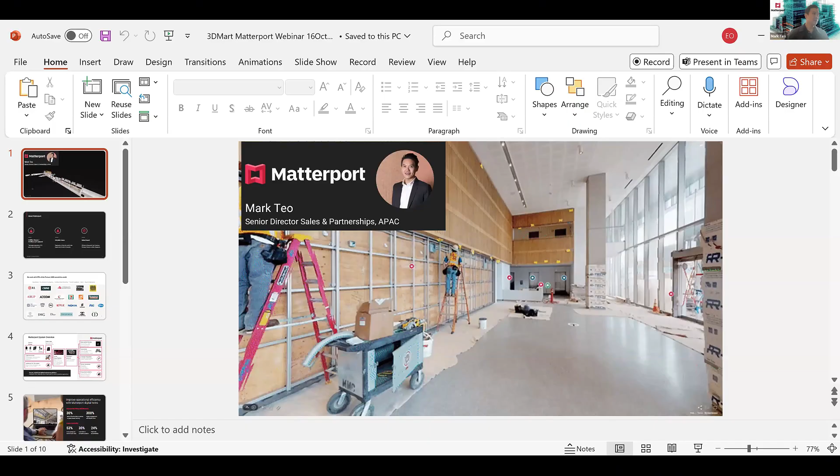Just a quick introduction of myself. By the way, Eleanor, yeah, okay, it's in slideshow mode. Great, so quick introduction of myself.

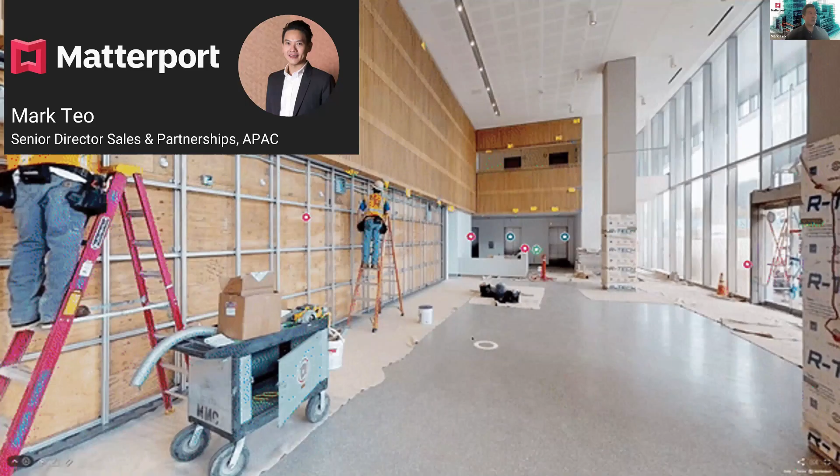My name is Mark, based out of Singapore. I've been with Matterport for over 3 years now, leading the commercial team in Matterport Asia Pacific. Appreciate everybody taking time off your very busy schedule to join us for this webinar.

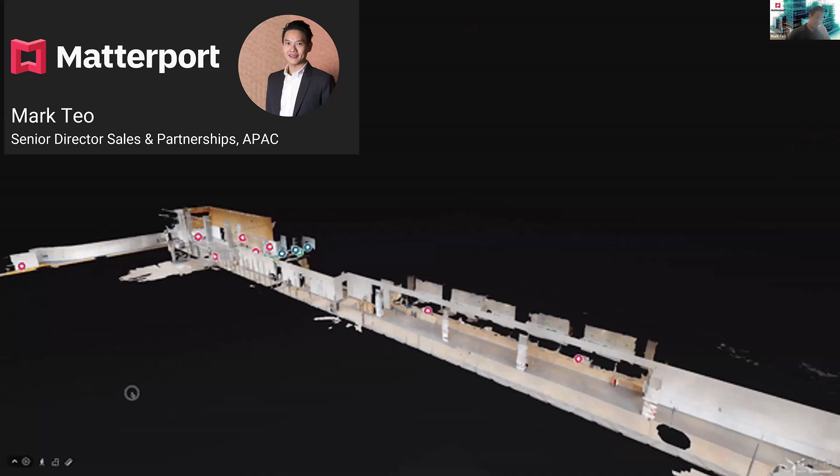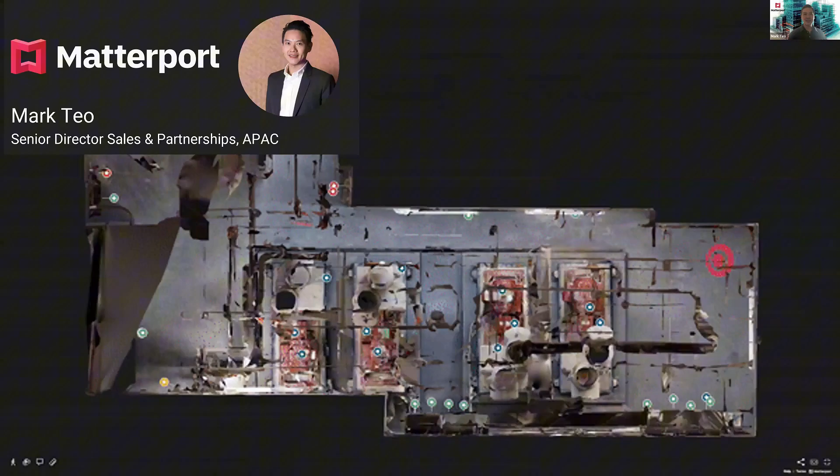So the thing is, something about myself, right? I tried to learn Cantonese, and I grew up watching TVB as a kid. My mom loves watching all the TVB dramas, and I usually just sit beside her and watch the show. And somehow or other, I just couldn't learn the Cantonese language until today. Probably this is one of the big regrets, that I've not been learning a lot of Cantonese in my younger days.

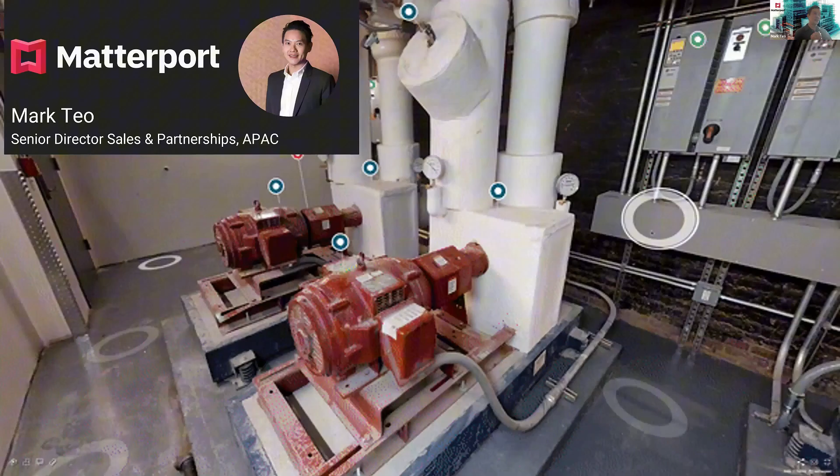So unfortunately, throughout this whole presentation, I'll be sharing Matterport solutions, introducing Matterport in English rather than Cantonese. So yeah, without further ado, I'm going to jump straight into my slide deck.

So quick introduction, Matterport, we are a NASDAQ listed, US-based company. Our HQ is in Sunnyvale, San Francisco, and we do have offices around the world, in Europe, where London is also our European HQ, and Singapore being the HQ for Asia Pacific. We also have presence in Japan and some of the other regions in US.

So just a few nuggets of information about Matterport. It's a company that was founded in 2011 and it got listed through SPAC in 2021, if I remember correctly. The company has grown tremendously, and I can recall this whole growth journey. In the past 3 years, the business was a lot smaller, and we grew tremendously over the past few years.

As you could see from the numbers here about Matterport, we are now managing over 5 million spaces, or rather models, and over 10 billion square feet of spaces that are being captured by our technology. And all over the world, we are seeing more than 250,000 users, and this number is increasing on a daily basis.

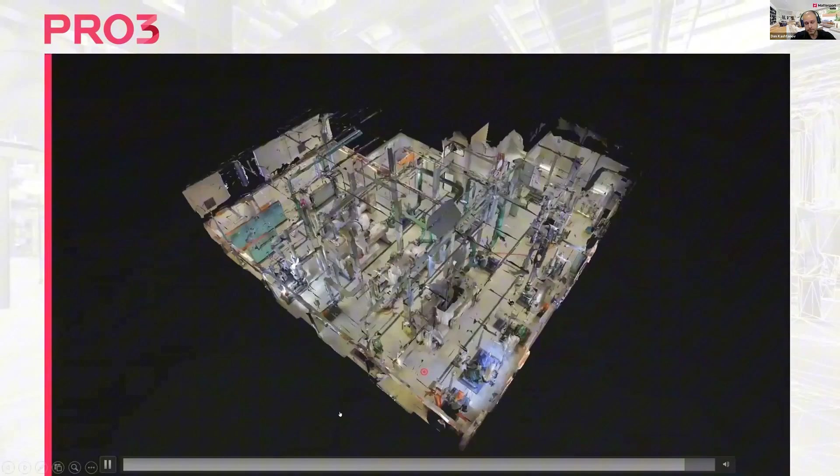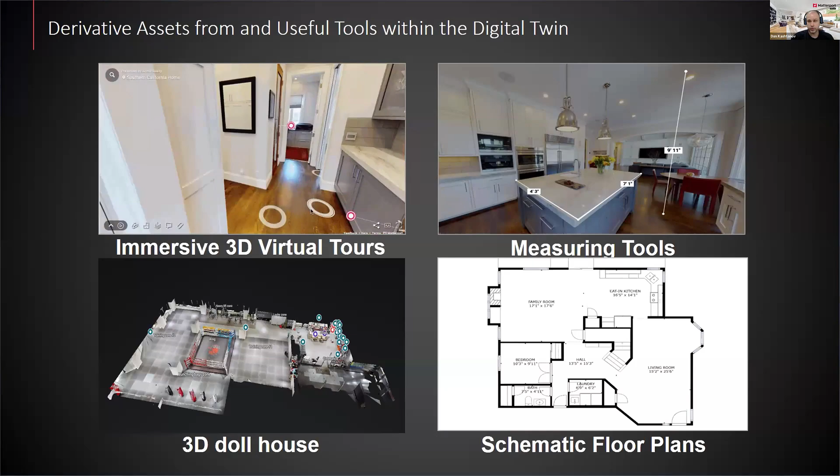Very easy to use. The second part of the solution is the software that will, based on the raw data from your camera, build a virtual tour for you. We'll show you this in a moment. Now let me show you a few examples of my projects.

So this is the virtual tour, one of the virtual tours we have. This is our showroom in Taiwan. This is what you will have after you upload your project to your account.

You see the scan points, and you jump between the scan points. The more scan points you have, the more you scanned, the more steps and jumps you can do.

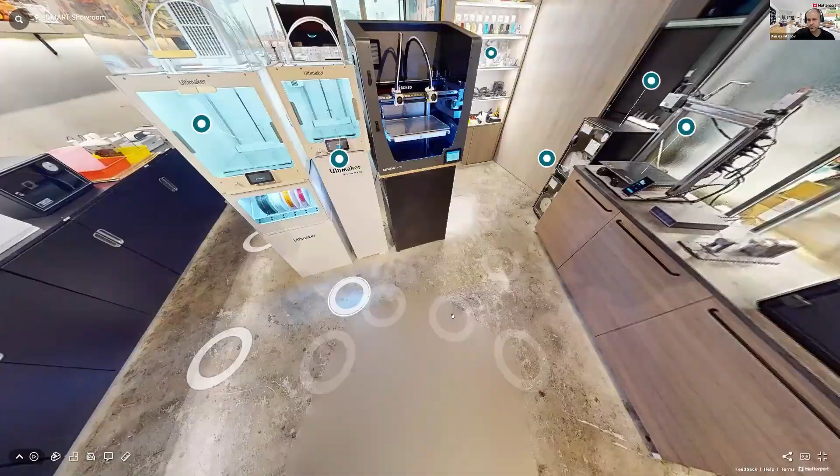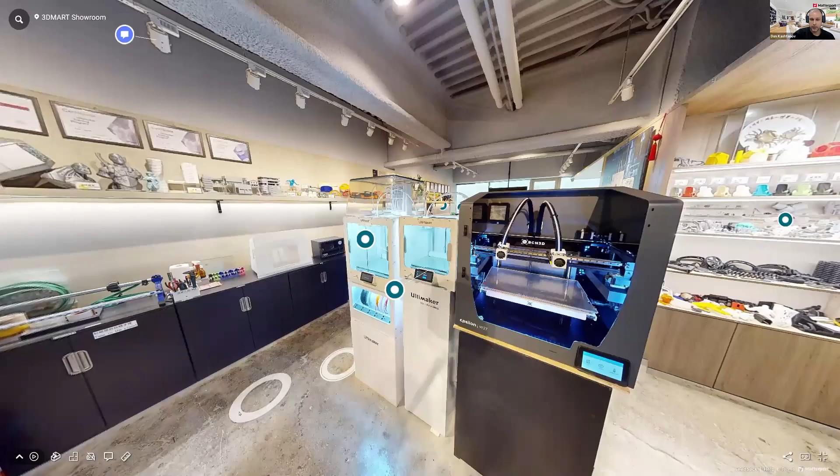You can have Mattertags, and you can put the video there, text, images. You can have rough measurements here. If you need very highly accurate measurements, there is a way to do it, I'll show you later. You need an E57 file, but more or less accurate measurements you can quickly do in this virtual tour.

For example, you can see if your equipment will be able to pass through the door, if the size is enough for your machine or not.

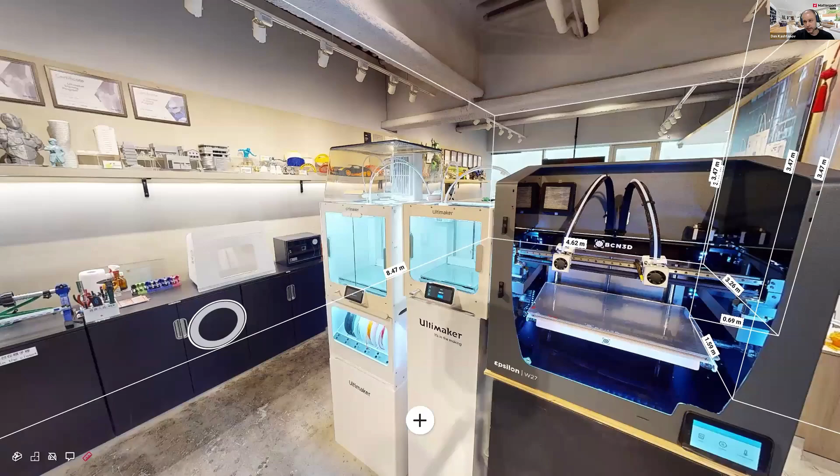Then a few things you can do with your project. If you go to the project editor, you have a few things you can do. You can select the start location, add labels, do the measurements that the customer will see. You can do a guided tour, tags, add notes.

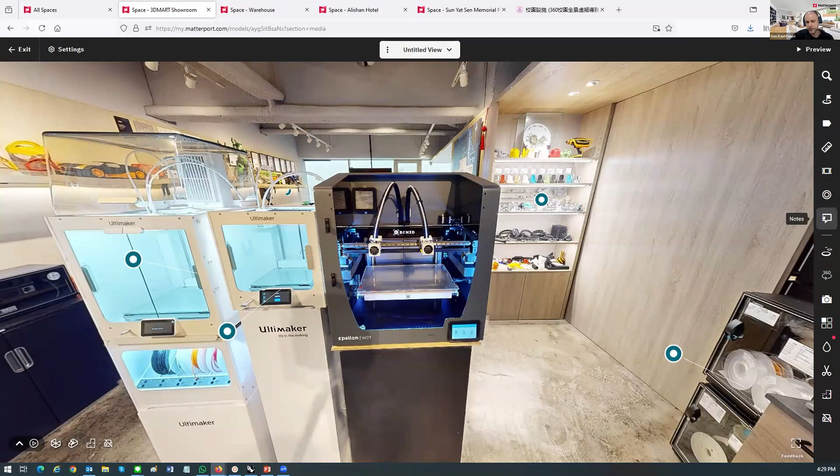This is to help you communicate with your construction team, with your colleagues. You can actually have notes that your colleague will be able to see and reply to.

For example, I just created a note: we need to fix this light. If I send this project to my colleague, they will be able to see this note. They will be able to ask me something, like can you send us the model that we need to change? And I will be able to send them the link. You can talk to your team.

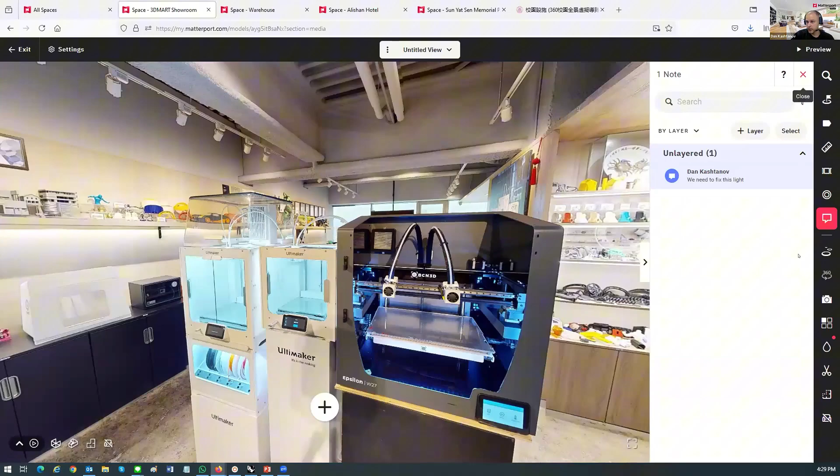You can see your scans, hide your scans, blur something. Let's say there is sensitive information you don't want to show, you can blur it. It will automatically detect faces, and if you wish, it will automatically blur the faces.

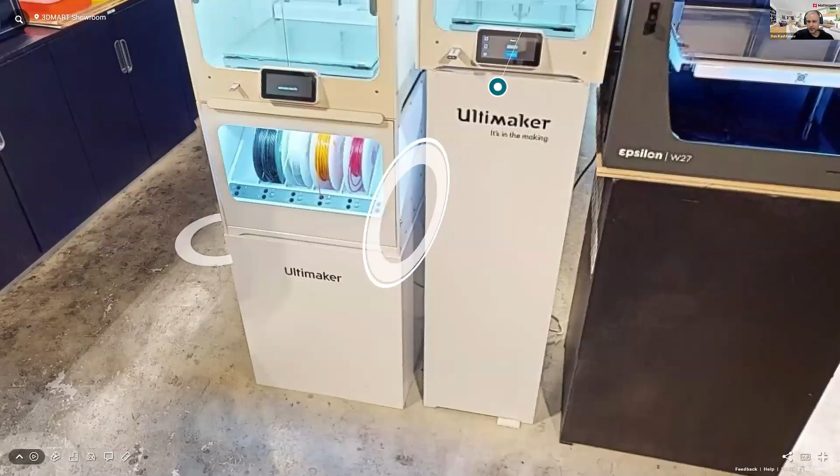That's pretty much it. Now, a cool thing here Mark talked about, but did not tell you more details. There's a new feature here called defurnish.

So you see the space, there's a table. It looks reasonably okay, but some apartments or residential spaces might look a bit cluttered, full of junk, I don't know. If you click the defurnish button, the AI will actually remove the furniture for you. See how cool is that?

Now it works, it's in beta. I guess a few glitches here and there are possible. But this AI tries to predict what's behind the furniture and just remove all the furniture.

And I think it was trained on residential properties, but it actually works on industrial spaces as well.

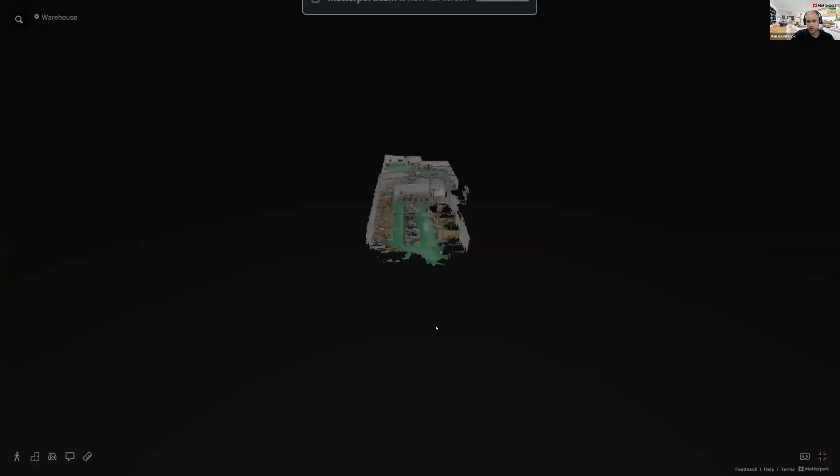We have a warehouse that we scanned for one of our partners. Defurnish works well even in the warehouse, and it doesn't only alter the pictures for you, it actually alters the whole space. You see it's empty space now, but actually it was full of boxes and cargo.

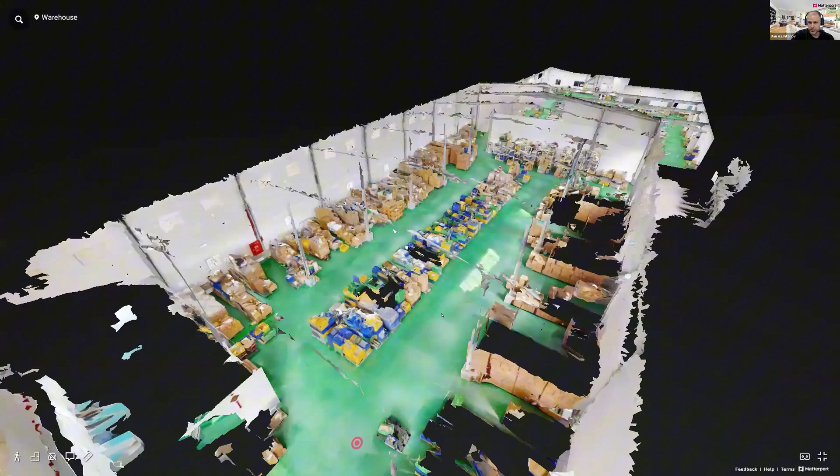Okay, so you can have a virtual tour, you can have a link that you can send to your customer. If you just share the link, you can embed it on your website.

For example, we have a school here in Hong Kong. They have a project of this school embedded on their website, or to show to parents, students, as a way of promotion.

Sometimes if they have a particularly equipped STEM room, they will show the STEM room with all the equipment.

And another thing I like is, let me show you this hotel. Now, this is a big project, a 10 floor hotel. And if we go, let me just show you how big it is.

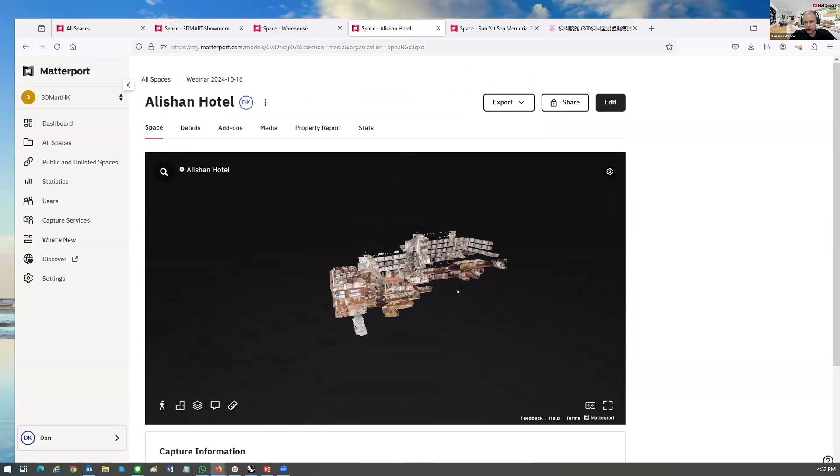Now, if we go to property report, you will see a 2D drawing of every floor, all the rooms and all the sizes. Now you see floor 1, all the rooms with the size, floor 2, and well, all the rooms. Indoor property totals is 5,000 square meters.

We didn't scan all the rooms. It was mostly corridors and exterior, but together with the rooms, it will be even more.

And this is, you have this for no extra charge. You click print, you can print it out, show it to your customers, real estate agents or potential buyers. Now, if you go to add-ons, there are a few things you can buy extra.

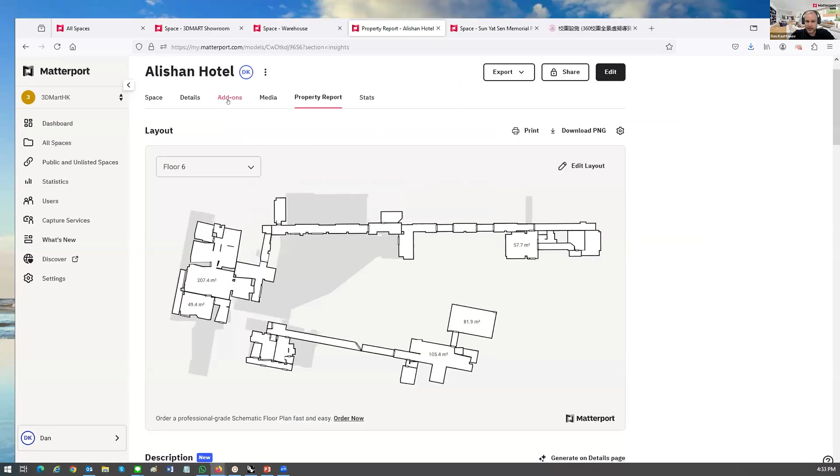They charge, they cost extra. You can buy a schematic floor plan, a professionally built floor plan, not an automatic layout. You can buy a CAD file in DWG format.

Well, some buildings, if they are old, they don't have drawings. We have a customer in the luxury sector occupying a space in the center of Hong Kong. The building is old, they don't have a drawing. So how do you build a drawing?

Well, the easiest way is to scan it with Matterport. You will have this file in hours. Mark, correct me if I'm wrong, I think it's super fast. It takes hours, you will be done in a day, and you will have the drawing of your space.

BIM model file. Some of you are here from architecture and construction sectors. If you are working with BIM models, you can order a BIM model from Matterport. It's quoted case by case, takes some time, but yeah, they will do it for you. And you can have an E57 file.

That's the file with all the data the camera recorded. That's a high density point cloud. And you can use that to do accurate measurements, or you can use it to build your BIM model.

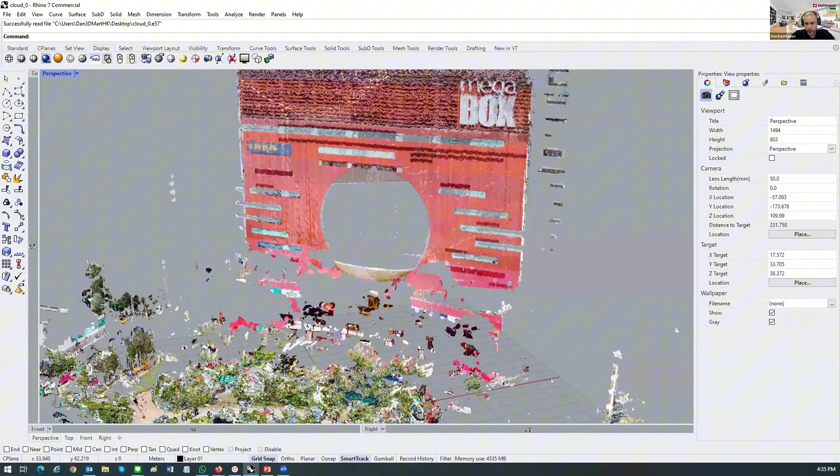Let me show you, just for those of you who don't know what it is. This is a point cloud. We scanned a zero carbon building, just a few scans alongside this path. And this is the point cloud that we downloaded.

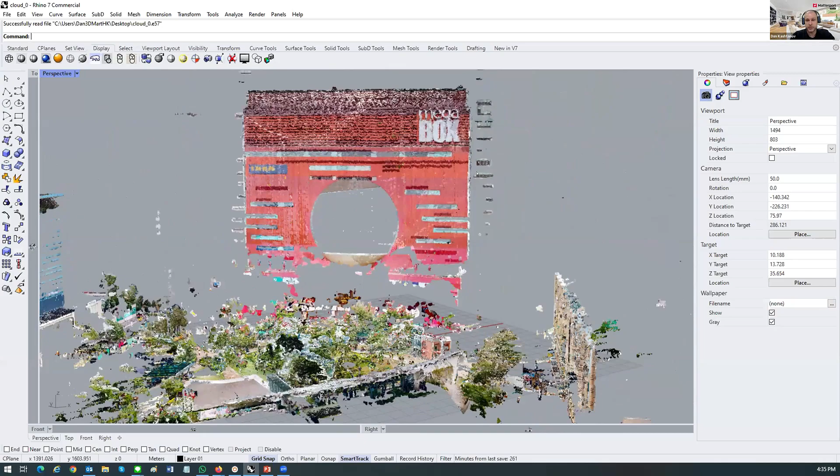How tall is Mega Box? It's a trade mall, 19 floors, and those trade mall floors are probably 5 meters each. So you see the range of the camera. We put the camera in the park, and we can scan the whole Mega Box facade.

So these are the basics you have with Matterport: E57 file, drawings, digital twin, you can do measurements. But there is more you can do, and our partner Robert will tell you more about his software that actually expands the functionality of Matterport to construction monitoring.

There are different software providers that use Matterport in their software. Some add AR, some add VR functionality, but what I found most useful for me and the customers we talk to is actually Robert's software, Sim Stages. So I think I can give the word to Robert to tell us more about his software and his offer.

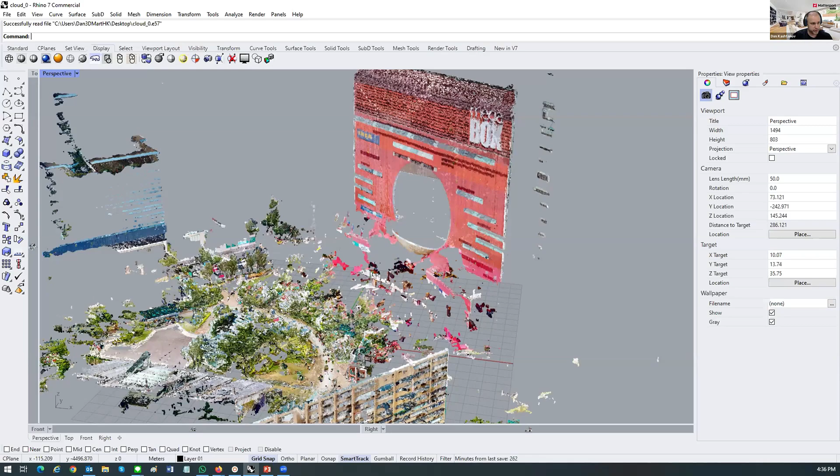Let me stop sharing my screen. And Robert, can you tell us more, please? Sure, thank you very much, Dan. I'm pretty happy that I can be here on this event and tell you a bit about our solution.

First of all, a few words about me and the company I'm representing. My name is Robert Czarlewski, and since April '22 I'm a product owner of Stages at SimLab. SimLab is a company located in Poland, founded in 2015, but its core operations started truly in 2019. The company's first product, Simon, emerged from the interest of

SimLab founder and CEO Marek Kozlak in smart home technologies and building automation. Stages initially began as an experimental project, but we very quickly realized it can be really interesting and has huge potential. In July '21, Matterport announced a strategic partnership and investment in SimLab, recognizing us as a key provider of tools that help AEC teams communicate more efficiently and effectively at every stage of a project. So that's the very brief history of SimLab.

Now, getting back to the main topic of my presentation, what is Stages? We say that Stages is a professional platform designed for monitoring the construction process and facilitating cross-sector communication, providing easy access to building digital documentation. It is specially tailored for building owners, construction companies, general contractors, facility managers, architects, and interior designers, as well as insurance companies and even banks.

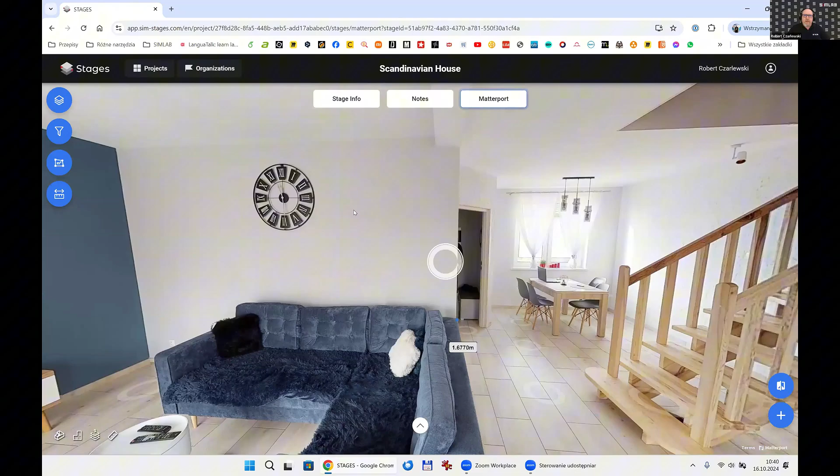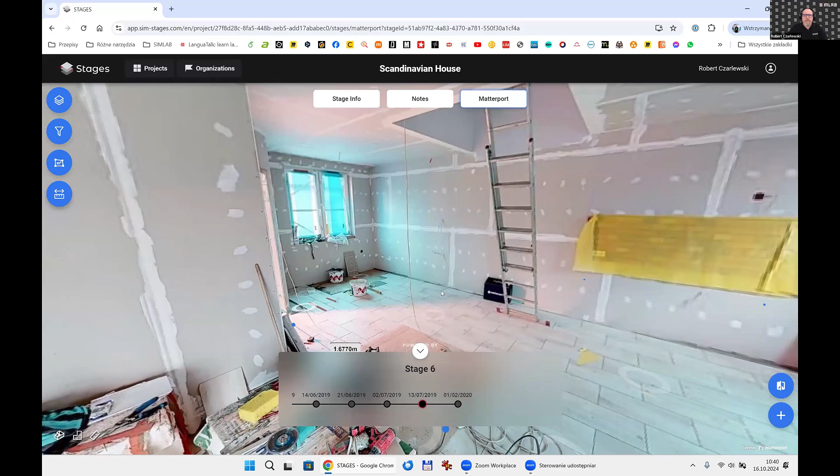we placed three most important tools. First of all, it's a timeline, which is hidden here under this white arrow. So if I switch between the stages, you will see the previous phases of the building. And what's important, when I'm jumping between the stages, the point of view of the camera stays the same.

So as you can see, I'm still looking at this particular window in the object. This is the timeline. Now, at this moment, a very important remark: the timeline will work correctly if we synchronize scans one to another. This is a very simple process, and it guarantees for the user that the timeline will work properly. Also, the next functionality, the compare view, will show the full potential and full range of information of our object.

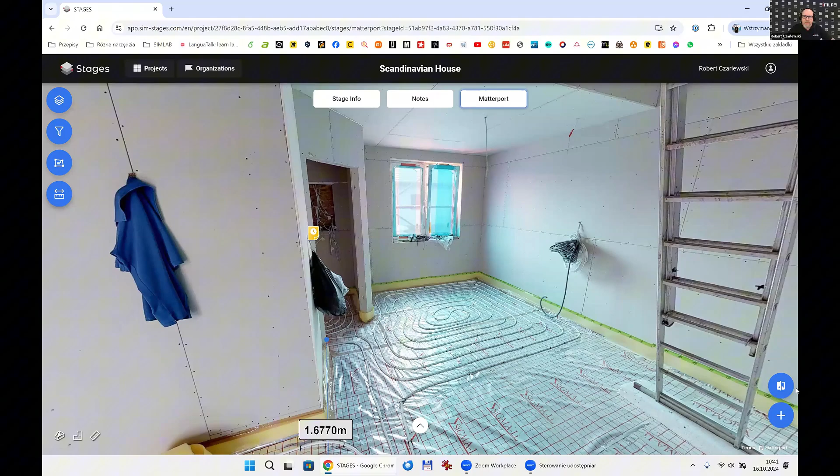So if I click this icon here, it starts our compare view mode, or split screen, and I can see the display is split into two panels. If I'm moving in one panel, the image on the other is also moving. So I can go through my scan, to my object, and it's easy to compare differences between chosen phases.

Of course, I can switch to another stage, and after loading, it will also display the differences. So this is the compare view mode.

And the last one is our toolkit for communication or annotation system. Take a look: if I click this small plus button here, it will open the dialog window. Using this option, I can pin some information on a scan.

So for example, first of all, I can change the title. Let it be example note. Now I can choose the place in the XYZ space to locate it. For example, I would like to place it on this wall.

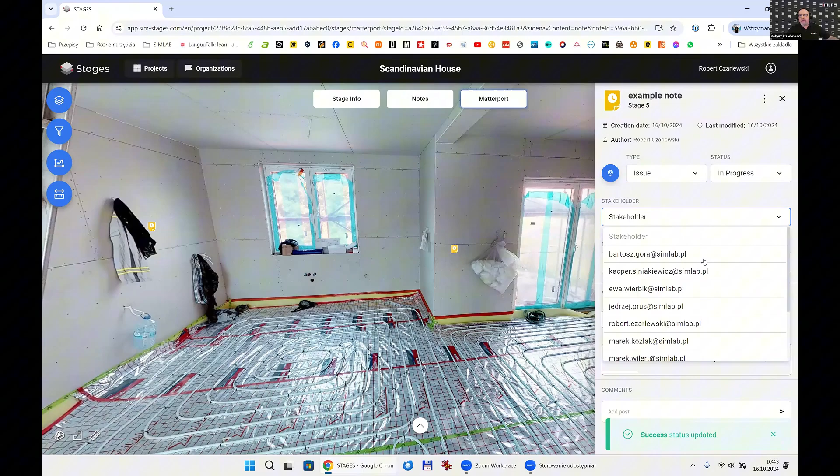Now we have a field for a short description, so we can put some random text at this moment. Additionally, we can add some attachments to our note, and we can do a lot of things with this option, because if I click an attachment, I can upload it from my computer.

So I can choose something interesting, I don't know, an audio unit for example, and it will be placed in a photo tab. As you can see, if I click the thumbnail, it will enlarge.

Also, I can add documents like PDF files, invoices, spare part catalogs, operations manuals, and so on, and those documents will be displayed in the Docs tab.

But also I can do a bit more, because I can record a voice memo like this: "Hey guys, please fix the problem. Customer will visit us tomorrow. Everything must work correctly." Now I can add the title for this note, save it, and this voice memo will appear here.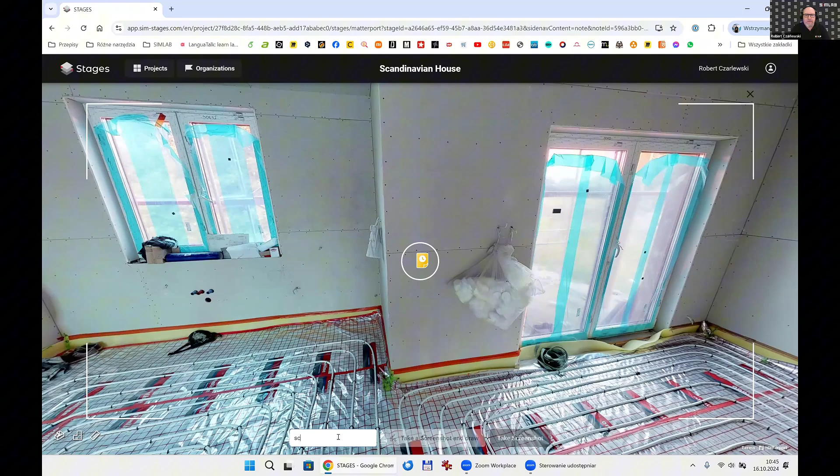And we can play it to know what's going on. Additionally, we can also do something like screenshots. So if I aim at a particular place in our object and put the title for it, I can take the screenshot, or I can do some drawings on the screenshot.

So if I click the taken screenshot and select draw, you will see that some additional interface elements appear. I can choose the thickness of the line, I can choose the color, and do some manual drawings, some manual remarks. If I click save here, this screenshot will also appear in the photo tab.

Why are we calling this tool a communication toolkit? Because first of all, we can assign those notes or issues to particular stakeholders, but also we can turn email notifications on or off. If I turn it on, that small envelope icon will appear here, and that's the sign that for this particular note, the email notifications are on.

The email notifications are sent to me as an author, and I will be kept informed about any change in this note. So if someone adds additional attachments, changes the status, adds a comment, or does something else, I will be informed about it, and the stakeholder will get the email notification that he's set up as a stakeholder for this particular note.

Additionally, we can transfer a note between stages. We can, of course, delete the note, and we can also copy the note's URL and put it in any messenger or email and send it to someone else, so they will get very precise information about which note they should take care of.